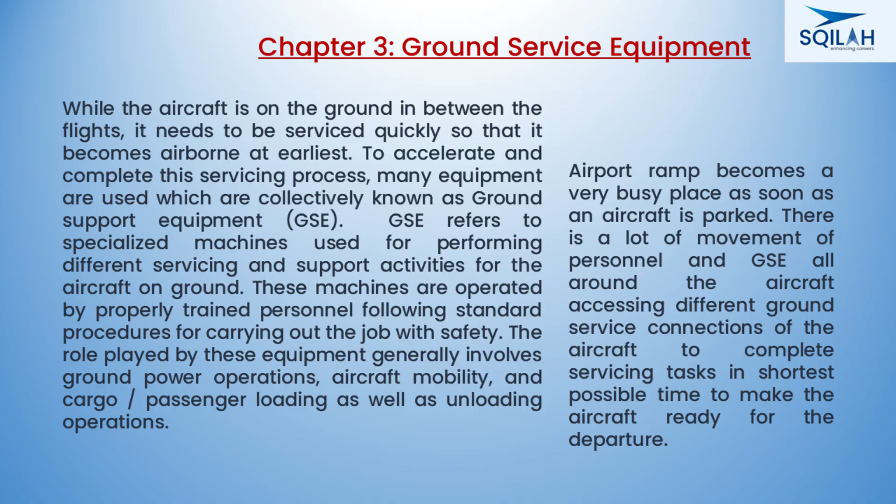The role played by these equipment generally involves ground power operations, aircraft mobility, and cargo/passenger loading as well as unloading operations. Airport ramp becomes a very busy place as soon as an aircraft is parked. There is a lot of movement of personnel and GSE all around the aircraft, accessing different ground service connections of the aircraft to complete servicing tasks in the shortest possible time to make the aircraft ready for departure.

Airport GSE comprises a diverse range of vehicles and equipment necessary to service aircraft during passenger and cargo loading and unloading, maintenance, and other ground-based operations. The wide range of activities associated with aircraft ground operations lead to an equally wide-ranging fleet of GSE. Some of these equipment are powered equipment, whereas some require external power to move them. Airlines employ specially designed GSE to support all these operations.

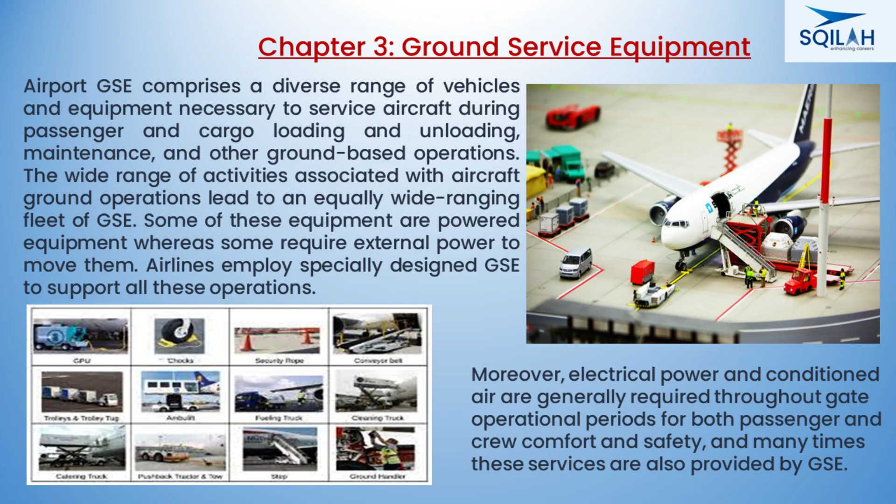Moreover, electrical power and conditioned air are generally required throughout gate operational periods for both passenger and crew comfort and safety, and many times these services are also provided by GSE. Activities of a ground service agency include cargo loading and unloading, passenger loading and unloading, potable water storage, lavatory waste tank drainage, aircraft refueling, engine and fuselage examination and maintenance, and food and beverage catering.

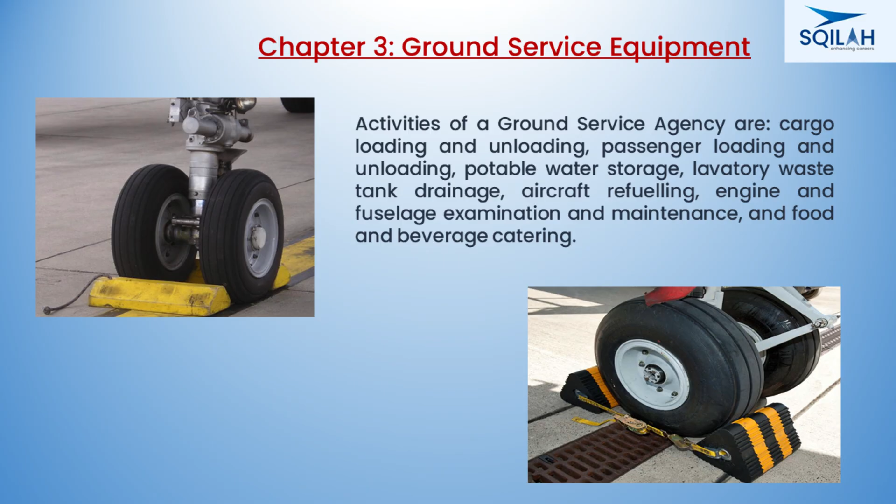Chocks. Chocks are used to prevent an aircraft from moving while parked at the gate or in a hangar. Chocks are placed in the front and back of the wheels of the landing gear. Therefore, chocks are typically found in pairs connected by a segment of rope or cable. They are made out of hardwood or hard rubber. The word chock is also used as a verb, defined as the act of placing chocks in front and back of the wheel.

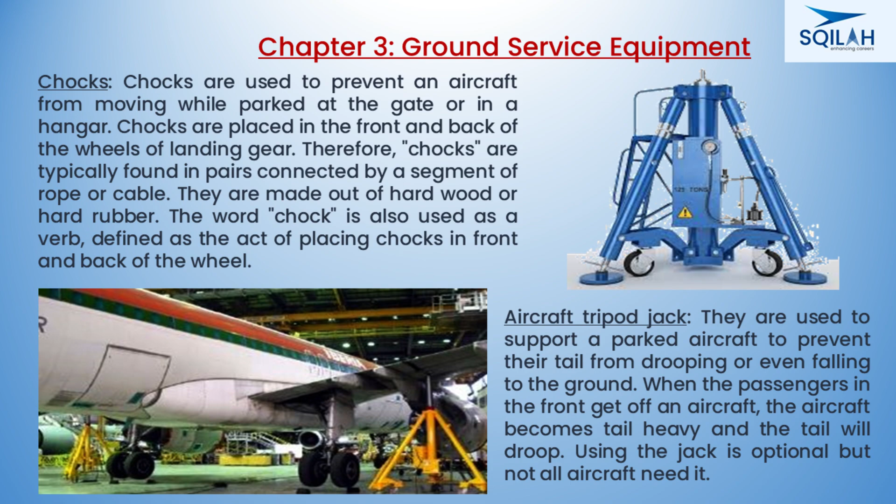Aircraft tripod jack. They are used to support a parked aircraft to prevent their tail from drooping or even falling to the ground. When the passengers in the front get off an aircraft, the aircraft becomes tail heavy and the tail will droop. Using the jack is optional, but not all aircraft need it.

Mobile lounges. Some airports use buses that are raised to the level of a passenger terminal and can only be accessed from a door on the second level of the terminal. These odd-looking buses are usually referred to as mobile lounges. These lounges are mostly seen at Washington International Airport, IAD.

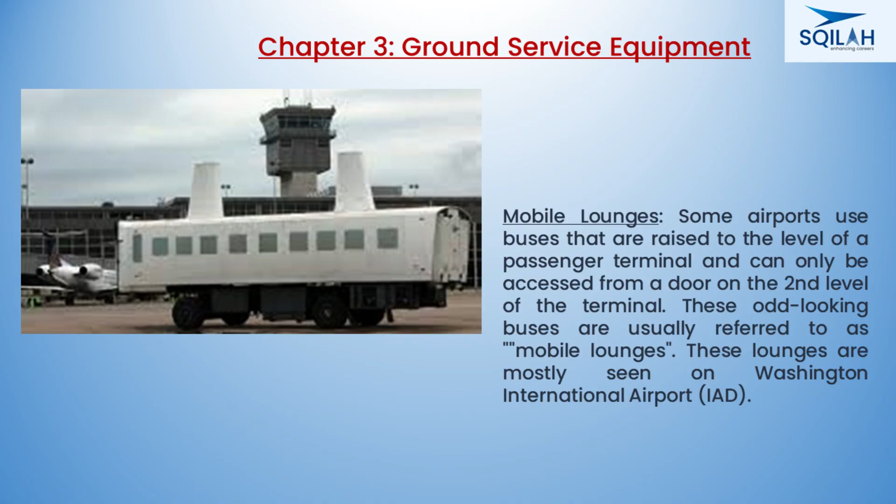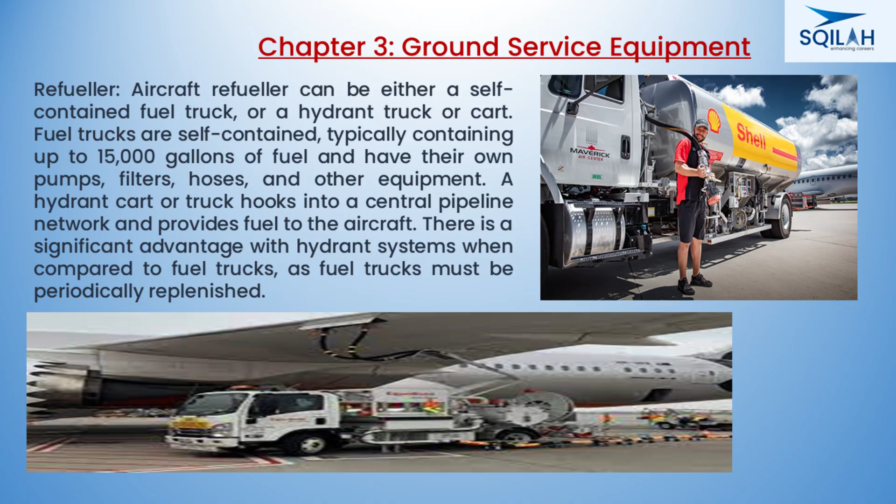Refueler. Aircraft refueler can be either a self-contained fuel truck or a hydrant truck or cart. Fuel trucks are self-contained, typically containing up to 15,000 gallons of fuel and have their own pumps, filters, hoses, and other equipment. A hydrant cart or truck hooks into a central pipeline network and provides fuel to the aircraft. There is a significant advantage with hydrant systems when compared to fuel trucks, as fuel trucks must be periodically replenished.

Pushback tugs and tractors. An aircraft cannot maneuver in the reverse direction under its own power and hence requires the aid of an external vehicle to move it away from the parking bay. This vehicle is called the pushback vehicle, and the process is termed pushback. Pushbacks are carried out by special, low-profile vehicles called pushback tractors or tugs. These tugs are very powerful, and because of the large engines, are sometimes referred to as an engine with wheels.

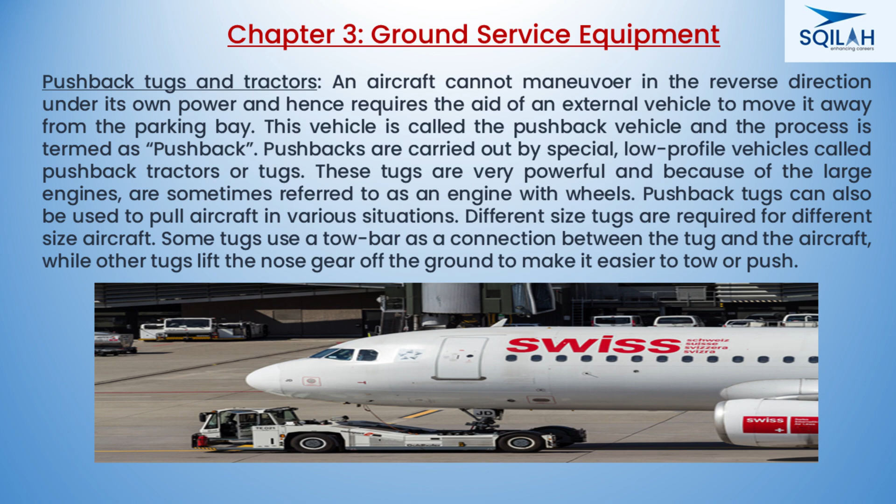Pushback tugs can also be used to pull aircraft in various situations. Different size tugs are required for different size aircraft. Some tugs use a tow bar as a connection between the tug and the aircraft, while other tugs lift the nose gear off the ground to make it easier to tow or push.

Taxibots. The taxibot is a semi-robotic, pilot-controlled aircraft towing system fitted as undercarriage. The vehicle tows the aircraft close to the takeoff point without running engines. This process is steered by the pilot.

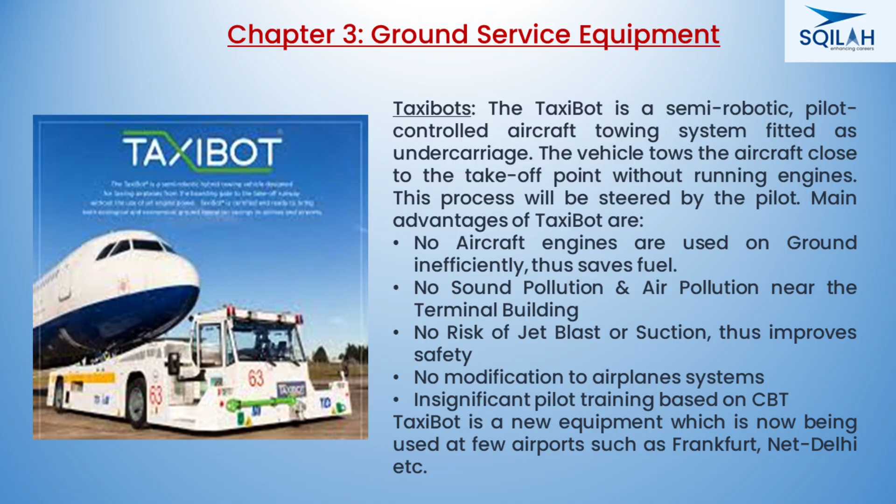Main advantages of taxibot are: no aircraft engines are used on ground inefficiently, thus saving fuel. No sound pollution and air pollution near the terminal building. No risk of jet blast or suction, thus improving safety. No modification to airplane systems. Insignificant pilot training based on CBT. Taxibot is new equipment which is now being used at a few airports such as Frankfurt, New Delhi, etc.

Tugs and tractors at an airport have several purposes and represent an essential part of ground support services. They are used to move all equipment that cannot move itself, including bag carts, mobile air conditioning units, air starters, and lavatory carts.

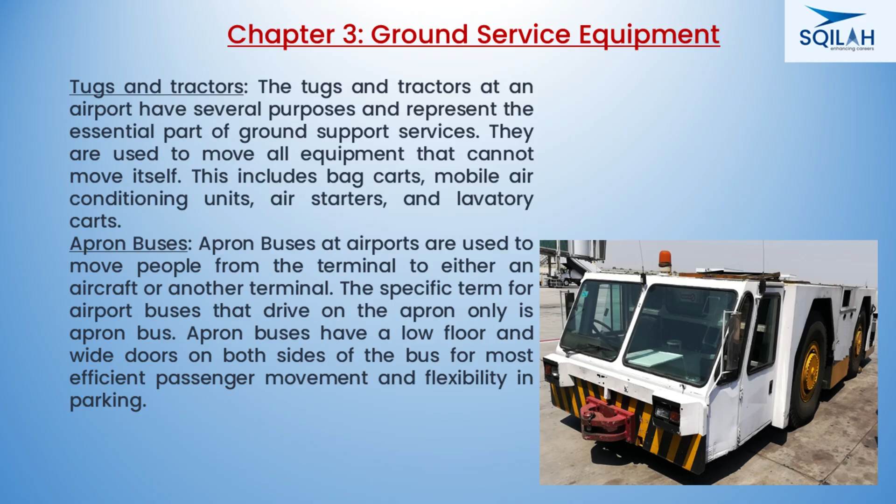Apron buses at airports are used to move people from the terminal to either an aircraft or another terminal. The specific term for airport buses that drive on the apron only is apron bus. Apron buses have a low floor and wide doors on both sides for efficient passenger movement and flexibility in parking.

Ground power units. A ground power unit is a vehicle capable of supplying power to aircraft parked on the ground. Ground power units may also be built into the aero bridge, making it even easier to supply electrical power to aircraft. Many aircraft require 28 volts of DC and 115 volts, 400 Hz of AC.

The electric energy is carried from a generator to a connection on the aircraft by a 3-phase, 4-wire insulated cable capable of handling 261 amperes. These connectors are standard for all aircraft.

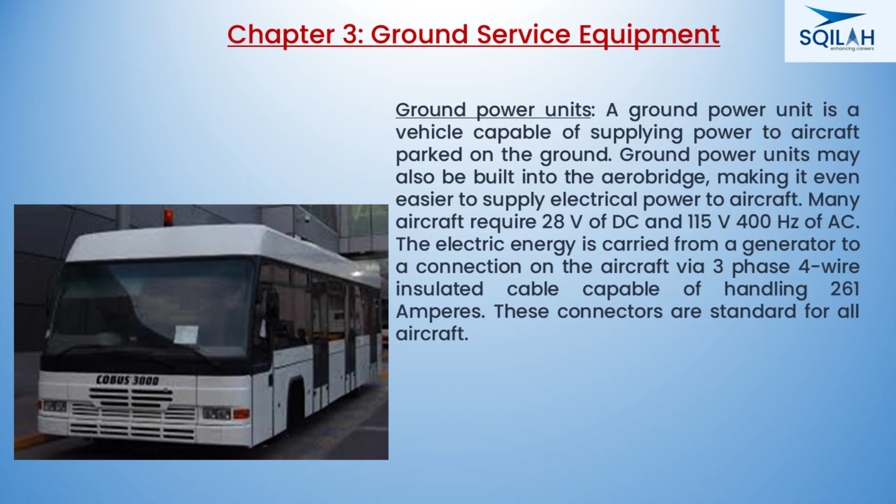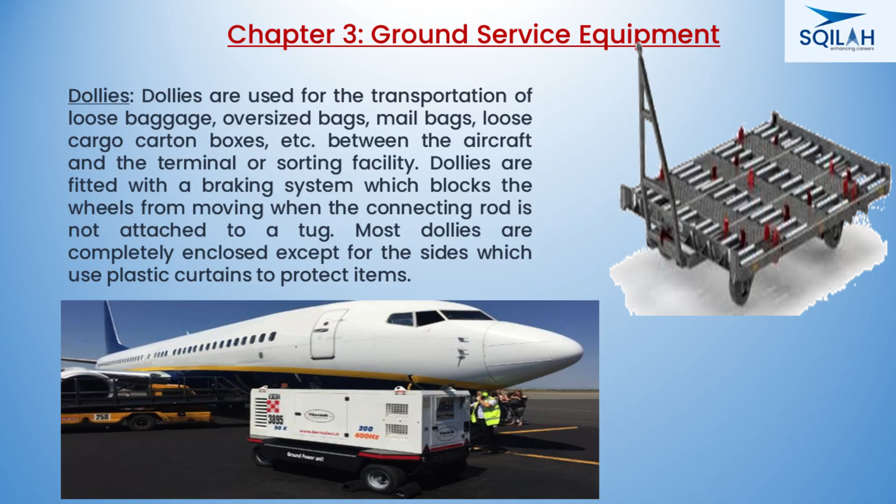Dollies are used for the transportation of loose baggage, oversized bags, mail bags, loose cargo carton boxes, etc. between the aircraft and the terminal or sorting facility. Dollies are fitted with a braking system which blocks the wheels from moving when the connecting rod is not attached to a tug. Most dollies are completely enclosed except for the sides, which use plastic curtains to protect items.

Container loaders, also known as cargo loaders or K-loaders, are used for the loading and unloading of containers and pallets into and out of aircraft. The loader has two platforms which raise and descend independently. Containers or pallets on the loader are moved with the help of built-in rollers or wheels. There are different container and pallet loaders.

Container transporter. Transporters are cargo platforms constructed so that, beside loading and unloading containers, they can also transport the cargo.

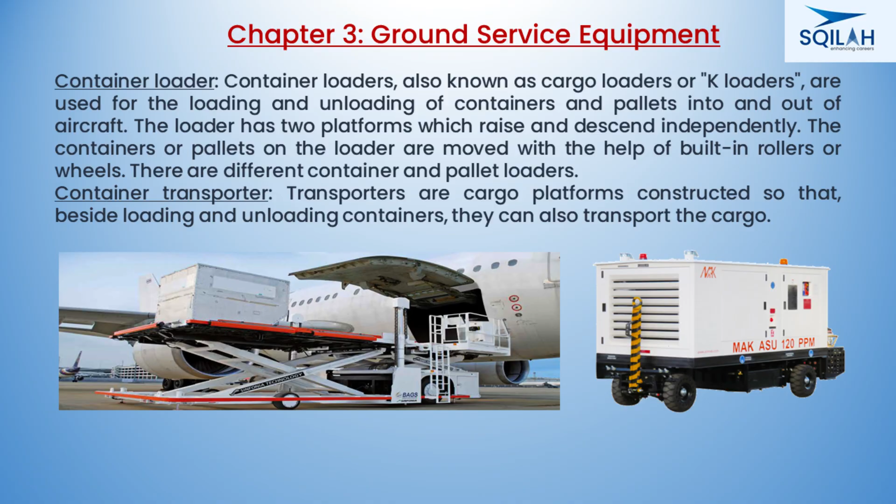An air start unit is a device used to start an aircraft's engines when it is not equipped with an onboard auxiliary power unit. These units can be of three types: a stored air cart, a gas turbine-based unit, and a diesel engine-driven screw compressor unit. All three devices create a source of low-pressure, high-volume air to start the aircraft engines. Typically 1 or 2 hoses are connected to these units, with the largest aircraft engines requiring 3.

Non-potable water trucks are special vehicles that provide water to an aircraft. This water, designated as non-potable water, is filtered and protected while being stored on the vehicle and pumped into the aircraft.

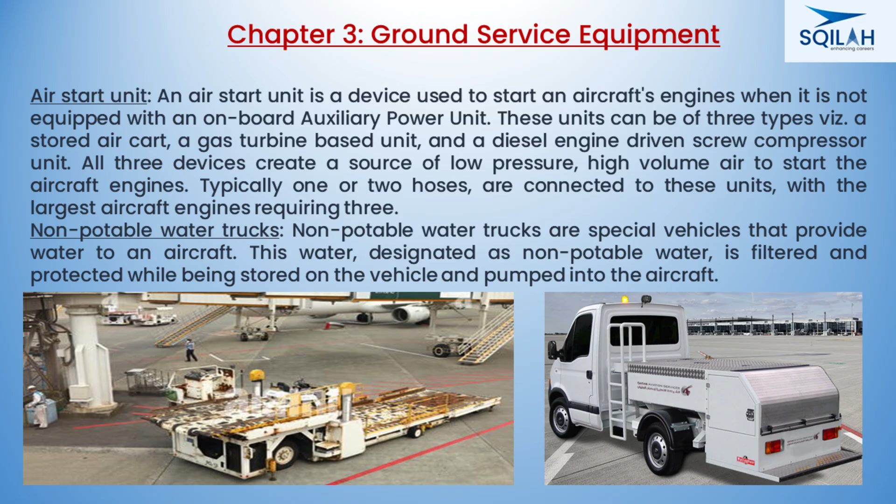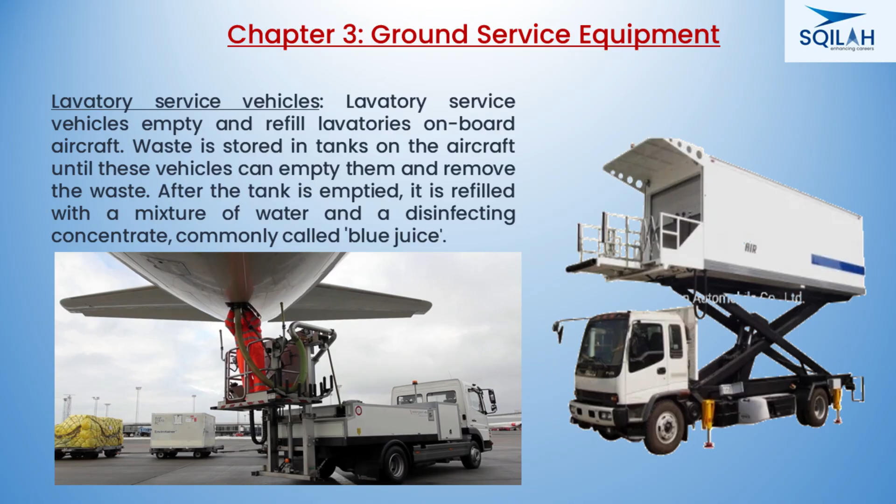Lavatory service vehicles empty and refill lavatories on board aircraft. Waste is stored in tanks on the aircraft until these vehicles can empty them and remove the waste. After the tank is emptied, it is refilled with a mixture of water and a disinfecting concentrate, commonly called blue juice.

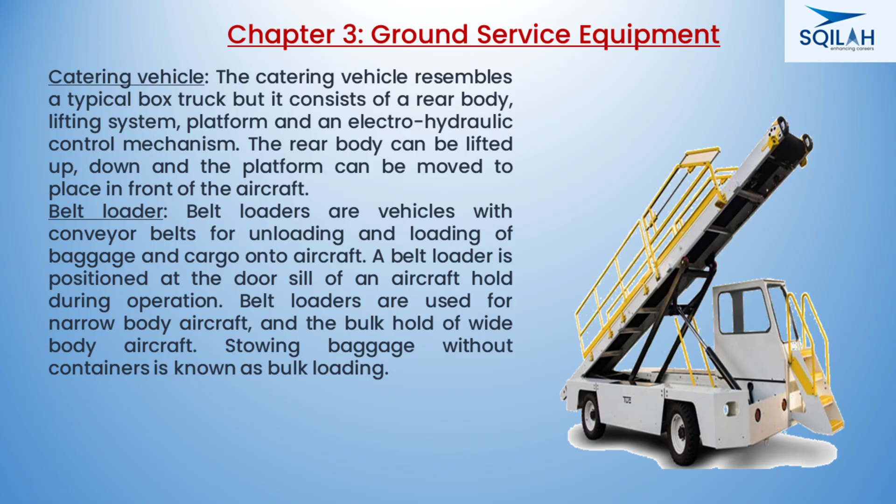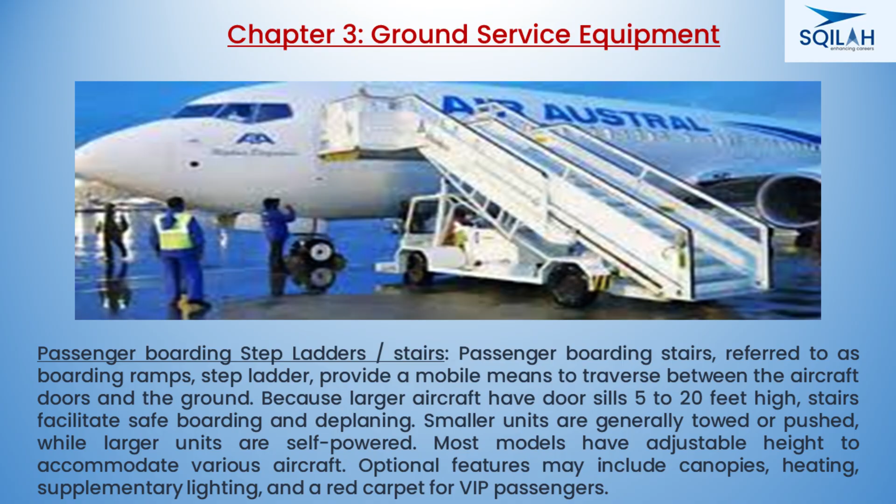Smaller units are generally towed or pushed, while larger units are self-powered. Most models have adjustable height to accommodate various aircraft. Optional features may include canopies, heating, supplementary lighting, and a red carpet for VIP passengers.

De-icing vehicles perform the procedure of de-anti-icing, protecting aircraft from fluids freezing up, using special vehicles. These vehicles have booms, like a cherry picker, to allow easy access to the entire aircraft. A hose sprays a special mixture that melts current ice on the aircraft and also prevents some ice from building up while waiting on the ground.

Other equipment required at the ramp includes forklifts, hydraulic mules, maintenance stands, wheelchair lifts and loading elevators, high lift vehicles, and aircraft service stairs.